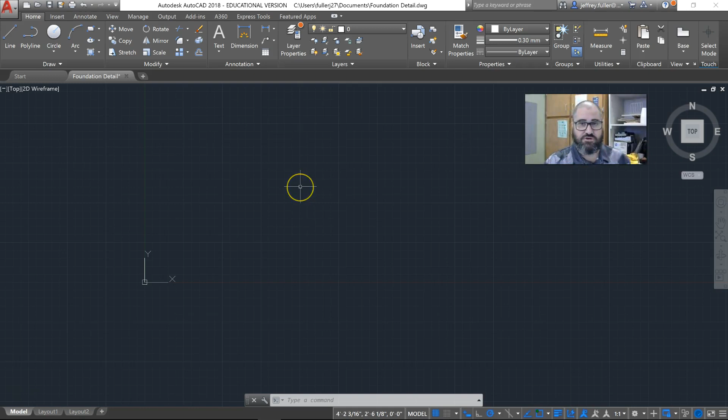So I'm going to go through it sort of quickly. The next foundation that you design, you're going to actually design from a set of instructions and not from a video demonstration such as this one. So there's going to be two foundations that you draw, this one and then the one you'll draw from instruction. So to start with, how I normally do it - now you can do it any way you want to, whatever gets you the end product most efficiently.

And the way I'm going to do it is I start with my top and my bottom, go ahead and get all of my height set, and then sort of fill in between. This is going to be the top of my stem wall, or starting with the top of my stem wall.

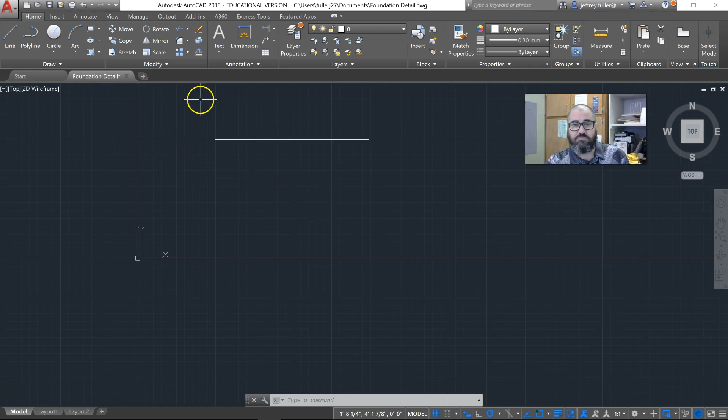I'm going to offset this. My stem wall is going to be 2 foot with an 8-inch footing, so I'm going to offset this line 2 foot 8 inches, okay?

And then I'm going to start building the footing. The footing is going to be 16 inches wide, and I can start right here on the corner if I want to. It's going to be 16 inches wide and 8 inches thick.

And then I can start trimming some things. And of course you don't have to - you can wait till you're done before you start trimming.

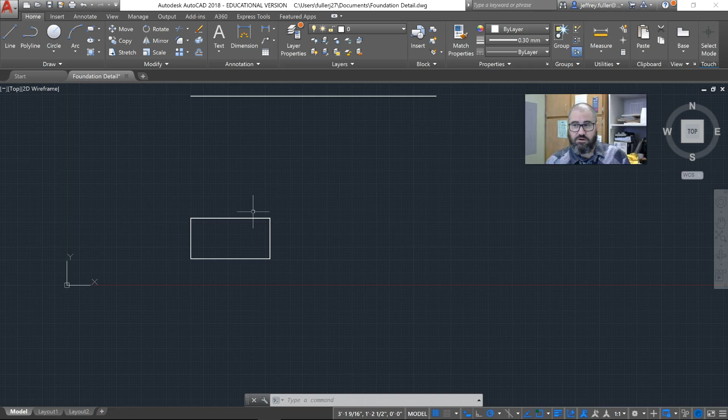Now there's also a keyway inside of this footing. A keyway is kind of like a notch in the concrete that's really just formed by placing an angular shaped piece of metal down into the wet cement and forming it around that. That allows the stem wall to keep from shifting once it's put down, because most of these parts are poured separately. You pour the footing, let it harden, and then pour the stem wall on top of the footing, and the stem wall would need something to help it maintain stability.

So what I do is the keyway is probably about 2 inches thick or 2 inches deep. So I'm going to find the center of my footing. I'm going to draw a 2-inch line down to the bottom, and then I'm going to start about 2 inches out on each side with another line. So I'm going to find my geometry here and drag over to the left about 2 inches.

Then I'm going to come down right in here. 70-degree angle seems like a good angle, and I'm going to do the same thing again over here - 2 inches. Come down, find my geometry, and we're going to do whatever the opposite of 70 degrees is.

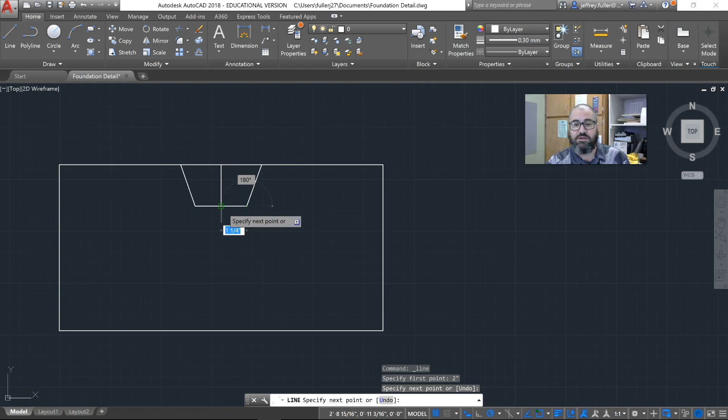I'm not going to try to sit here and mathematically figure it out. Maybe I can do it in my head, but I'm not going to do that either. I'm just going to draw it, because the keyway is not going to be perfect anyway when they lay it out. And trim that out - so now there's that notch that your stem wall is going to pour into.

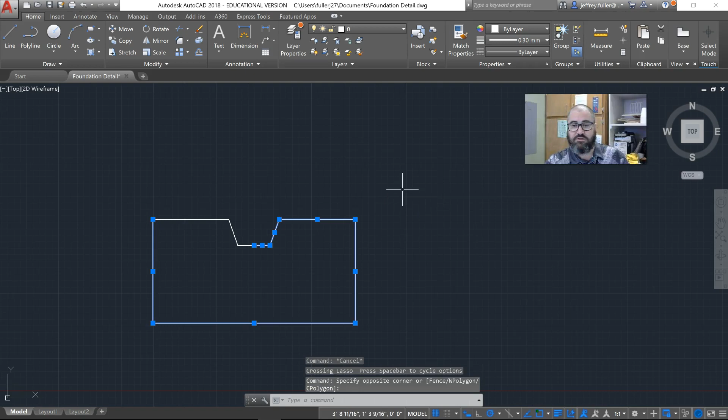Now while I'm here, I'm going to go ahead and make this one whole unit, one polyline, and I can do that just by selecting everything and typing join, and now it's all one unit.

Okay, now for my stem wall, it's probably good to start, I would say, from here. Now the stem wall itself is 16 inches wide - no, I'm sorry, the footing is 16 inches wide. The stem wall is going to be 8 inches.

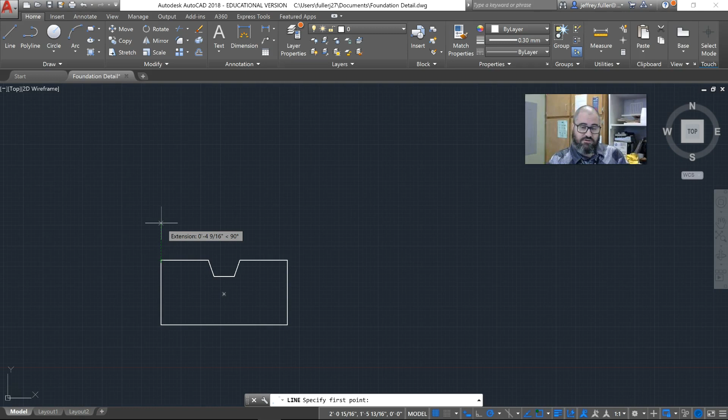So what I would do here is just kind of start drawing 4 inches in, identify the geometry, 4 inches, and then I'm just going to offset that 8 inches. And if I didn't say so already, this is a T-type foundation.

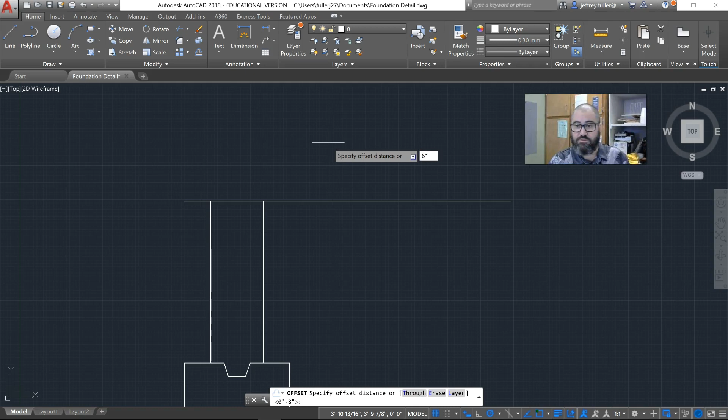Now I am going to have, like I said, a slab that you already have. I'm going to offset that. My slab itself is going to be 6 inches - I'm going to go ahead and go with a 6-inch slab. It's going to be a heavy-duty slab.

So here's what I want to do - some trimming. I'm going to put an expansion joint right here, and to do that, I will offset this about 1 inch, do some trimming.

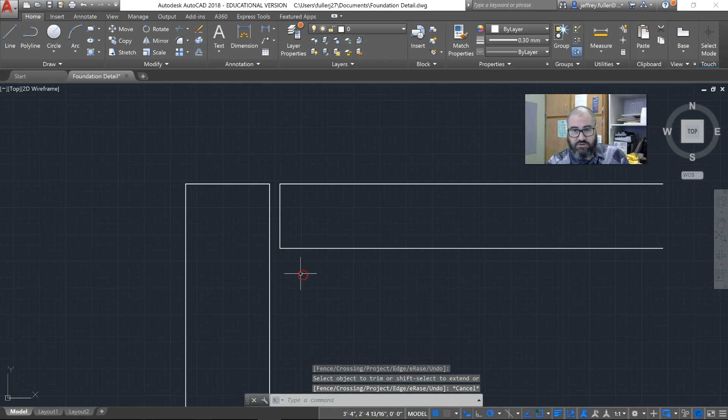Okay, we'll come back and actually fill that with some material to represent the bituminous material, the asphalt type material that would go in there and allow for expansion. Okay, so we've got our stem wall and that's all good.

Now we need to draw where the earth is in comparison to the stem wall. The way I'm going to draw my earth is by using one of these two tools, which are spline tools. One's a spline fit and one's a spline CV. I'm going to use a spline CV, but you can use whichever one you want.

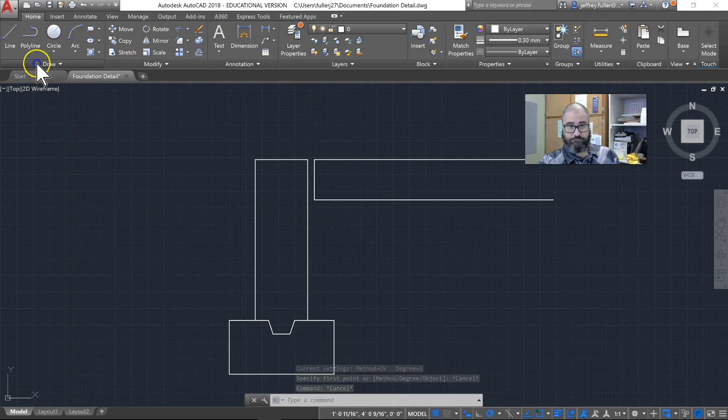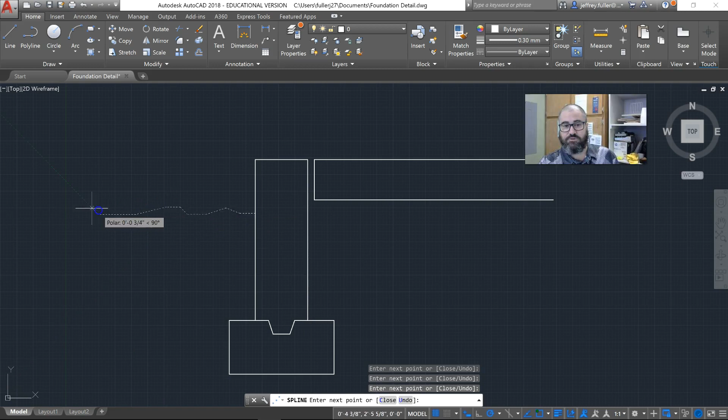I'm going to put my earth in—this is important, you need to have at least 8 inches of exposed stem wall. So I'm going to start 8 inches down and start coming out. Because this is earth, you could just draw a straight line and be perfectly fine, or draw something that represents what earth would look like. So that is the natural grade, that is the grade level.

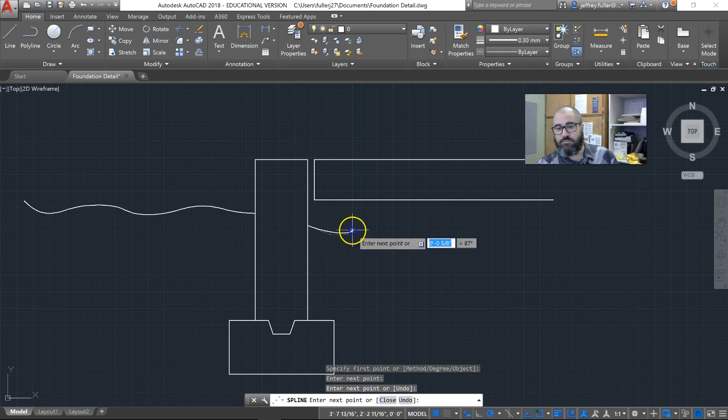Now, our grade level here is going to be slightly lower, only because it's been excavated. It doesn't have to be much lower since there's not going to be any basement or crawl space. So there's the earth. This right here is going to be filled with sand, and I'll show you how to do that.

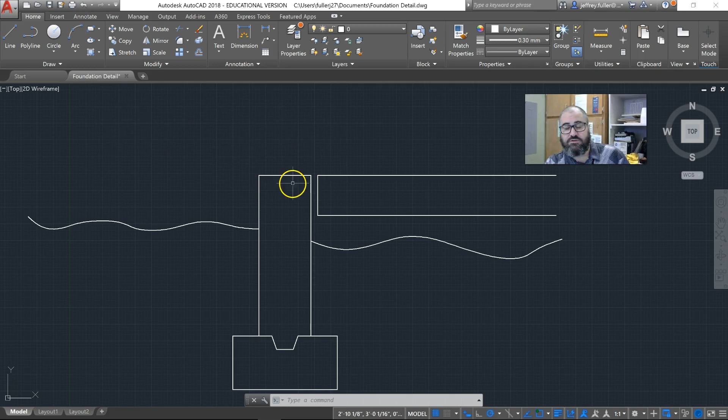Really, that's all that's left. Next is the hatching—I want to hatch this material to make it look like what it's supposed to represent. Also here, I can do a J-bolt for the walls that are going to bolt down to the stem wall, and I can make that a little thicker so it looks more like a J-bolt—let's go up to 1.4 millimeters.

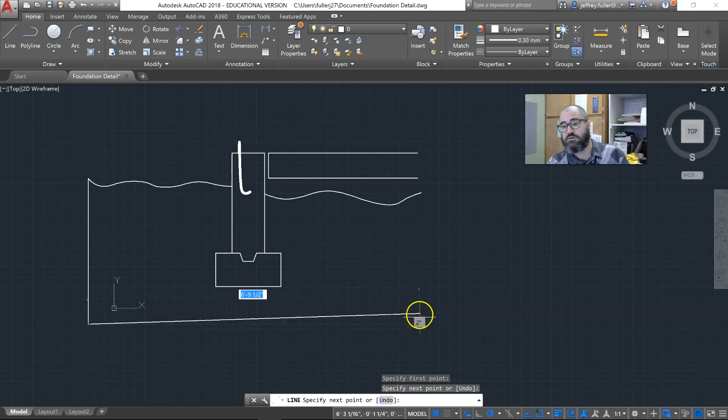I also need to seal everything off here so I can hatch some of that. I'm just going to take a regular line tool and draw across here—this will define my area. Now I can actually hatch everything. Right here, I'm going to seal this off too with a kind of curved line because it's going to represent more of a flexible type material. All right, as far as drawing, there it is.

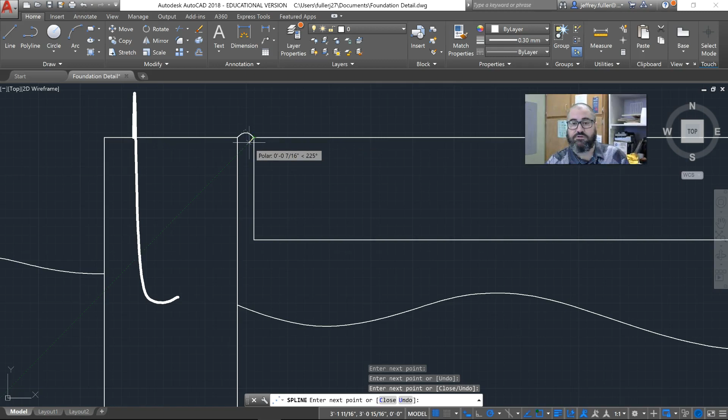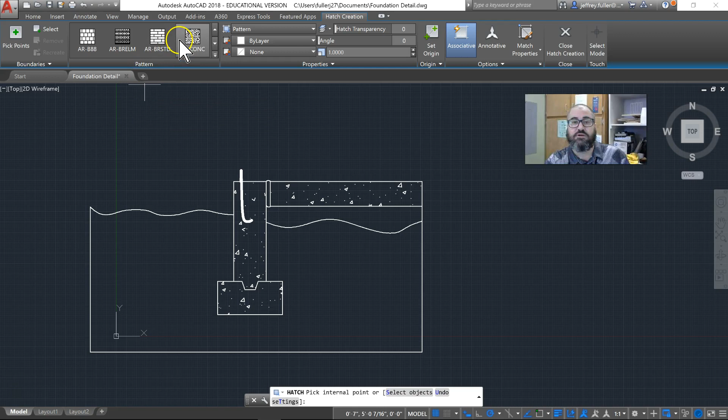Now we just go into hatching, and I want to find the concrete hatch right here—everything is concrete. I'm going to click inside of it and make it concrete. Now I'm going to hatch again, this time earth, right here, and I need to scale that up some. You just hold down that scale button.

Now I need to fill this with compacted sand—it's up top here, sand. Sometimes your cursor will get a little stuck when you're trying to place your hatchings, it kind of slows down the program a little bit. Here I'm going to scale it down a lot smaller so I get it real grainy looking, like so.

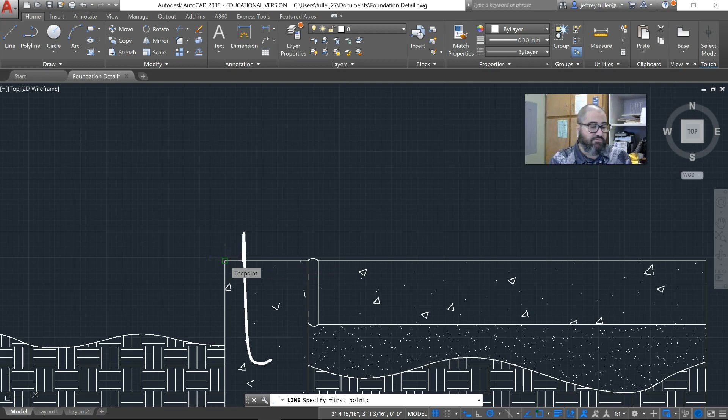Okay, and then on here I would go ahead and draw part of my wall. Right here what I want to draw is a 2x4, basically the cut end of a 2x4, which is my sole plate, and it needs to be 3.5 inches. Then here we're going to apply a short break line. All right, that's it.

Now I'll do some more hatching to my wall here so you can see what that is supposed to be, and when I come back, I'll have the dimensions already applied. Okay, now this is my finished foundation detail.

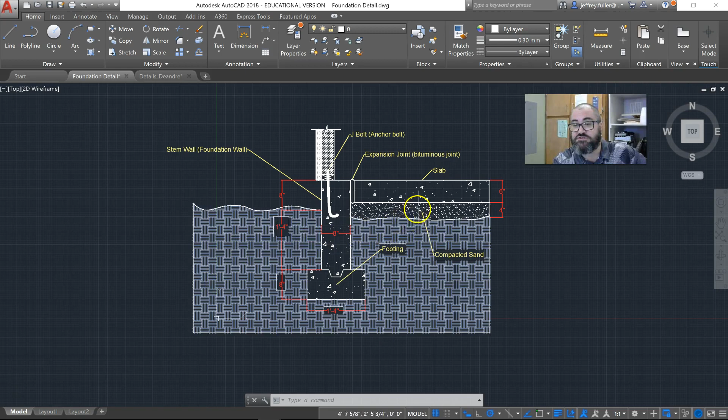I'll take you on a tour around this. You see I have my labels where I label all the parts with a trade name and an official name, I guess. Everything is labeled—you see here where I put in my hatchings for the earth, the sand, the concrete, and the different wall components.

And the wall, of course, isn't the primary concern on this particular foundation, but you do want to put that there. Sometimes the wall is actually part of the wall plan, or the wall detail is part of the foundation detail in some cases. But here we are.

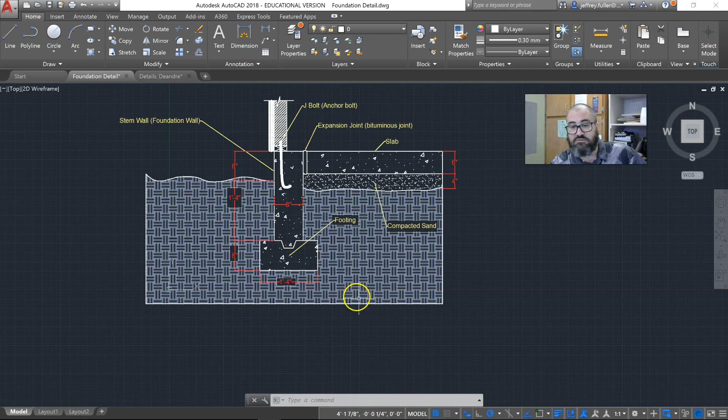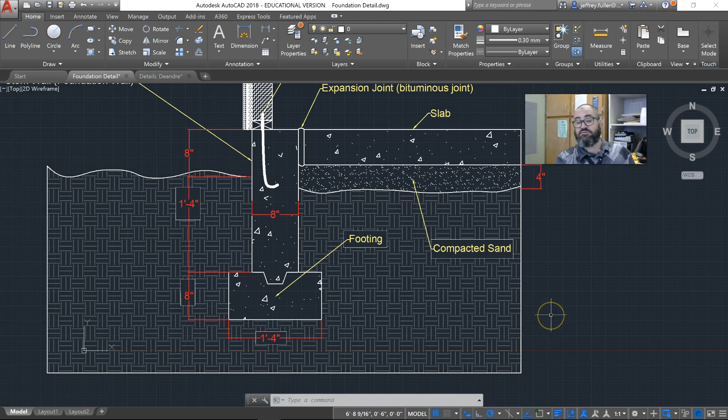If you need to know how to cut these footings—I mean not the footings, but cut the hatching out—so that you have your text where it can be read, just ask me and I'll show you how to do that. It's real easy—go ahead and place everything first, and then I'll show you how to correct that. But anyway, that's it. See if you can draw one just like that.